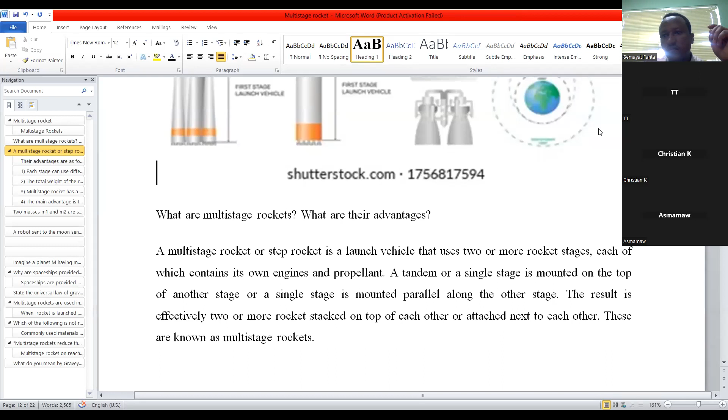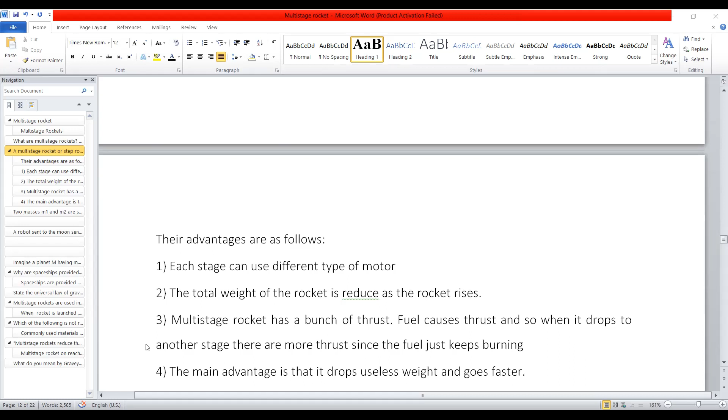What are the advantages of using a multi-stage rocket? Each stage can use a different type of motor, and the total weight of the rocket is reduced as the rocket rises. The third advantage is multi-stage rockets have a bunch of thrust - that fuel causes thrust, and when it drops a stage, there is more thrust from the remaining fuel, so it keeps burning. The main advantage is that it drops useless weight and goes faster.

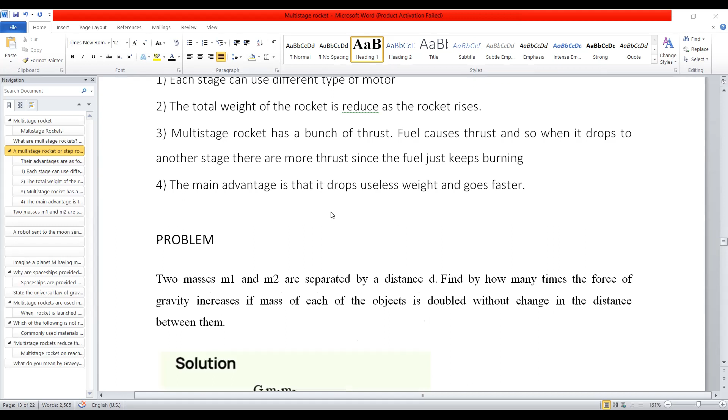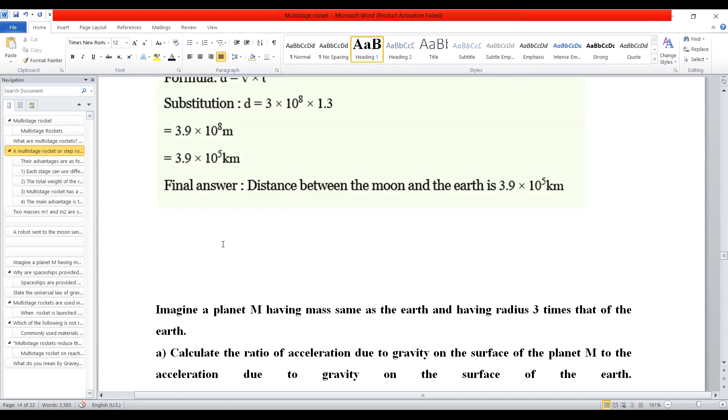These questions are not related to the topic we are talking about. Anyways, let it be there.

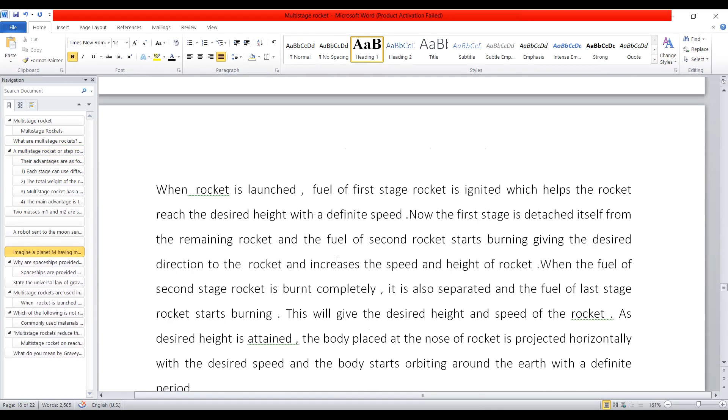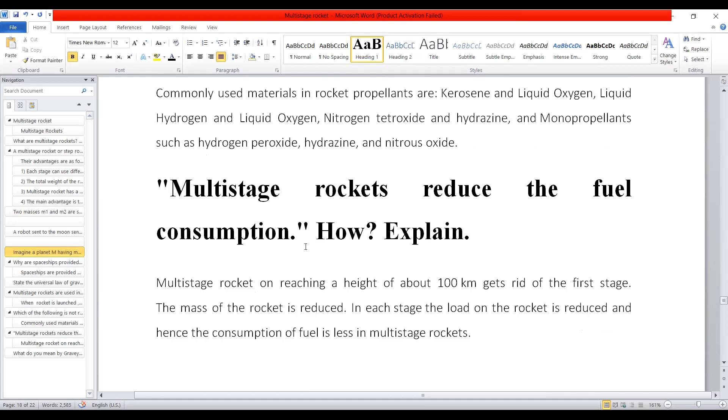So we say multi-stage rockets reduce fuel consumption. How does it happen? A multi-stage rocket, at a height of about 100 kilometers, gets rid of the first stage, and then the mass of the rocket is reduced. At each stage, the load on the rocket is reduced, and hence the fuel consumption is less in a multi-stage rocket. This is a simple answer.

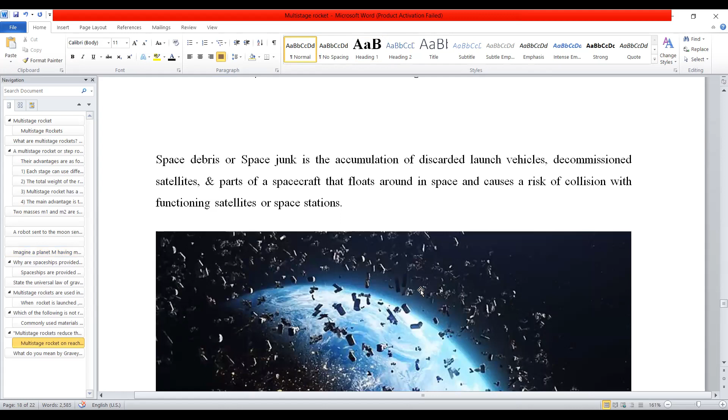What are space debris? These are multiple stage debris present in space, caused by stage separations. There are also some small asteroids and meteoroids which are orbiting around the Earth. So these are kinds of space debris.

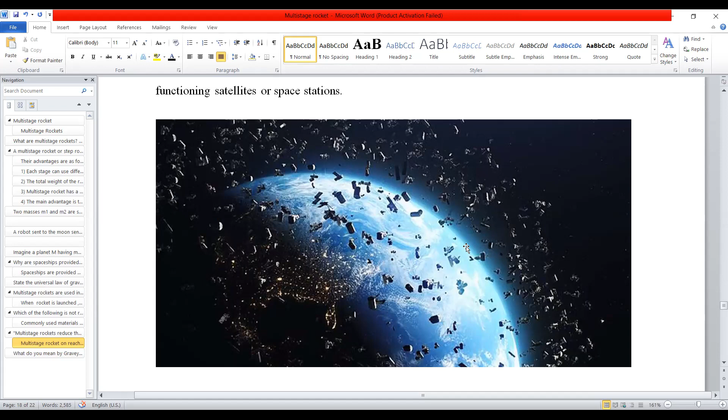Similarly, near the Earth's surface, because of discarded mass or discarded skeleton structures, we can find a number of debris like this. Not only this, there are some satellites which decay after a certain period - those that lost their fuel after a long time are also simply orbiting around the Earth. So these are also called space debris.

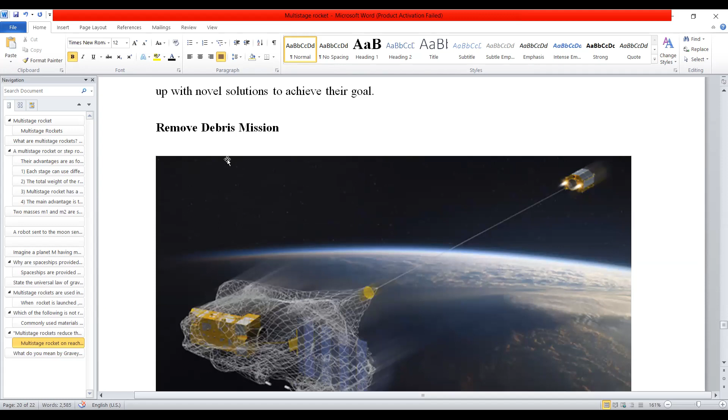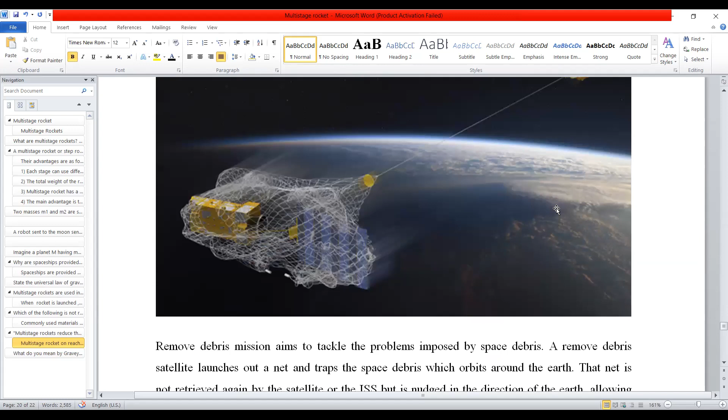So how can we collect space debris? There is a mission called the Remove Debris mission. This is the method people use to try to remove debris from space - they collect it with the help of some net. There are space launch vehicles which are launched to particular areas considered to have a concentration of space debris, so they can collect it like this.

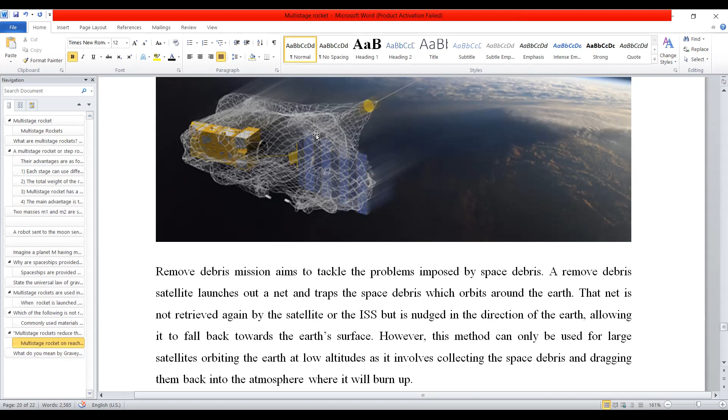Sometimes, a Remove Debris mission aims to tackle the problem posed by space debris. So the Remove Debris satellite launches a net that traps debris - there are traps and nets collecting debris from space. That is a kind of remedial action.

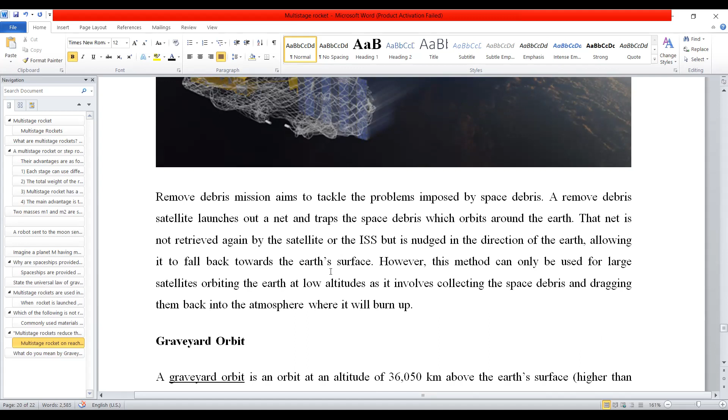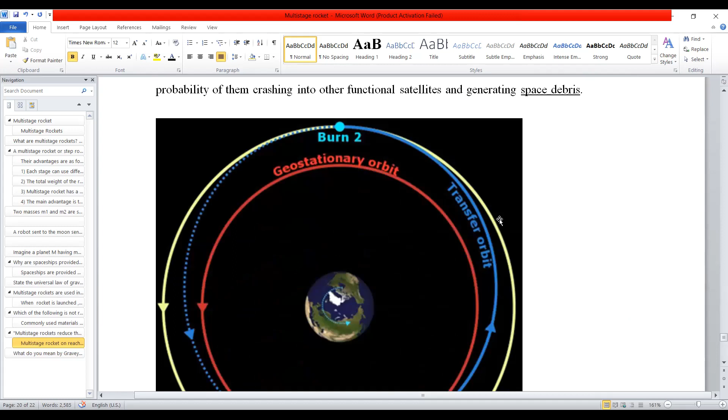The net is not retrieved again by the satellite or the ISS, International Space Station, but it is nudged in the direction of the Earth, allowing it to fall back towards the Earth's surface. So it collects the debris and brings it all back to the Earth's surface. That is the kind of remedial mission for collecting space debris.

Let's go back to the previous slide where we stopped, since I transferred from that slide to this one, in order to get more information. So staging is simply the jettisoning of self-contained propulsion units known as stages after the consumption of their propellants - a crucial technique for improving the mass ratio of a space transport system, not using an environmental engine.

The first theoretical analysis of staging was done by the well-known Russian scientist who developed the rocket equation, known as Konstantin Tsiolkovsky. To achieve a higher final velocity, the launch vehicle must be multi-staged and remove some of the structure that is no longer needed during the flight. This is the method.

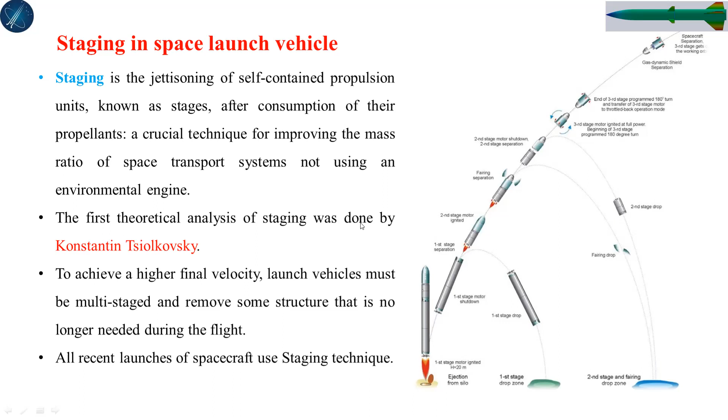So this is the method of how we can create staging and stage separation. What we discussed previously is all the same concept. So staging types are like serial staging, parallel staging, serial-parallel staging, and single stage case.

And stepper. So the serial staging is simply how we can connect a serial connection, having stacks on top of each other, one on top of the other. In the parallel, or sidewise mounted, the sustainer and booster stages are connected side by side.

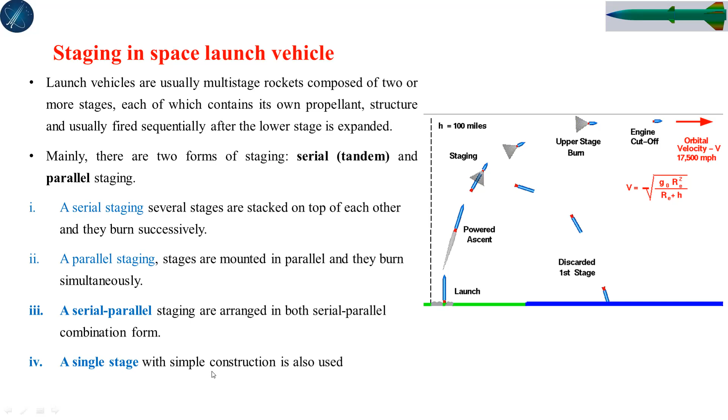And the serial parallel is a combination of the two. Another staging is single stage. Throughout the process, there may be only one single stage. That means even the structure with no use also gets carried along with that kind. But this is not an efficient method.

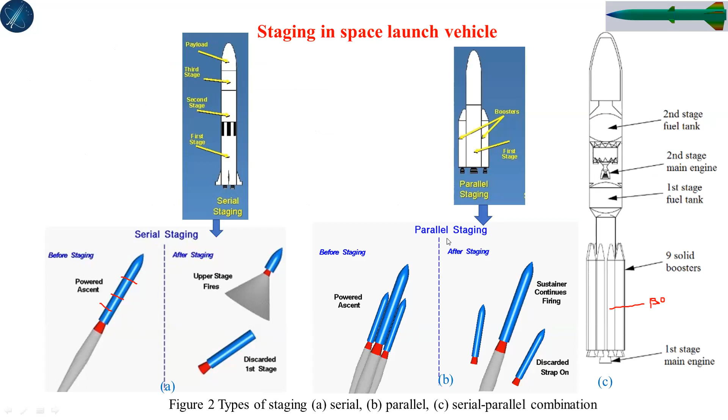So these are some of the serial or tandem staging, the parallel staging, and the combination of the two. This is what we have discussed already.

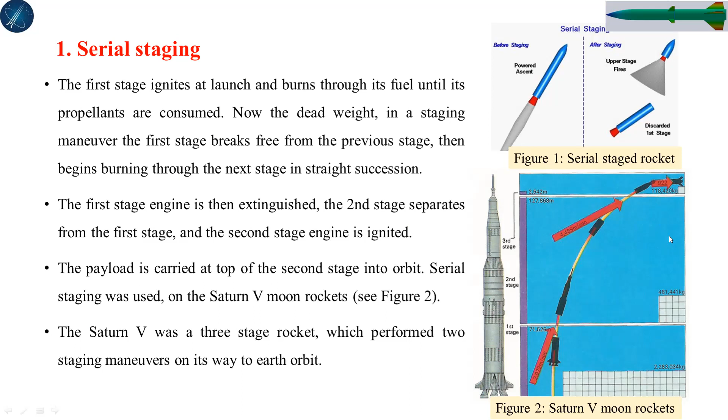So initial mass was 2,283,034 kilograms. At separation of the first stage, you can find 481,441 kilograms only. And at the final stage, after the separation of the second stage, the third stage left is 118,420 kilograms. So this is the amount of mass reduction and the amount of velocity gain we are checking here.

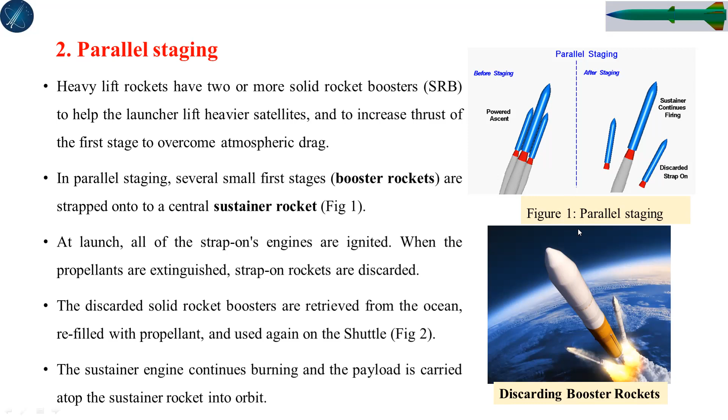So this is the parallel staging as we have discussed earlier. Serial parallel staging also exists. Single stage only - single stage to orbit, or we call it SSTO.

This type of vehicle reaches orbit from the surface of the body using only a single propellant and fluids, without expending or discarding the skeleton. Fully reusable vehicles that can fly into orbit and return to a landing site like an airplane ultimately use this type of staging - not really staging, but just a single stage.

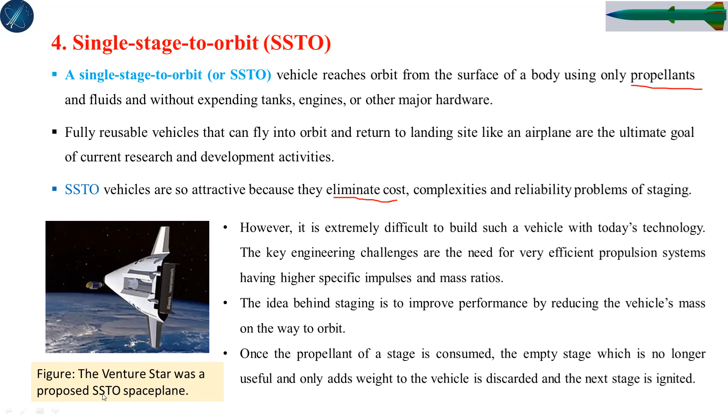So the best example is the Venture Star, which is called the SSTO type.

Another important thing, once we start to talk about staging, is the ascent trajectory is one of the important things. What is the ascent trajectory? We may have a particular point of launching, and after launch, the spacecraft will go through some trajectory path. So that trajectory should be designed at the very beginning.

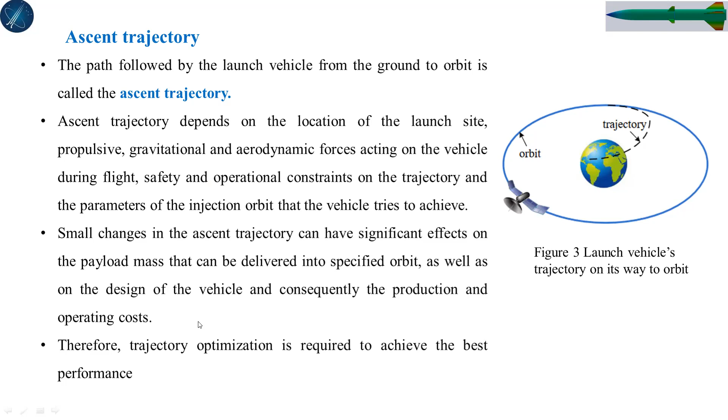Propulsive, gravitational, and aerodynamic forces act on the vehicle during flight. So for safety and operational constraints on the trajectory and the parameters of injection, that the vehicle tries to achieve, we can search for an appropriate trajectory and appropriate launching site. A small change in the ascent trajectory can have a significant effect on the payload mass that can be delivered into the specified orbit, so we have to think about how to optimize the ascent trajectory.

The second thing is the spacecraft. Still, what we are talking about is a space launch vehicle. Spacecraft is another thing. So spacecraft is just a vehicle, a machine designed to fly in outer space.

Outer space means space beyond the atmosphere. Artificial satellites and spacecrafts are used for a variety of purposes, including communication, Earth observation, meteorology, which is accurate measurement of conditions for navigation purposes, for space colonization purposes, for planetary exploration, and for the transportation of humans and cargo to space. For that purpose, we need a spacecraft.

This is a spacecraft, the Soviet Union's first spacecraft, sent in 1961. It is called the Vostok capsule, and it was sent with Yuri Gagarin. Yuri Gagarin left on April 12, 1961, with the capsule called Vostok. That is one of the spacecraft sent to space and come back to Earth. So this is not a reusable type, it is expendable.

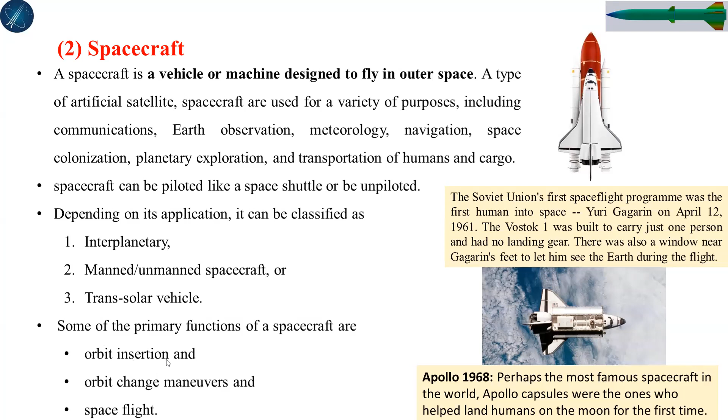Some of the primary functions of spacecrafts are orbit insertion purposes, orbit change maneuvering, and space flights. These are the main functions. The secondary function of spacecraft is attitude control, spin control, momentum wheel and gyro unloading, and stage separation. So these are secondary purposes.

In order to execute these functions, a spacecraft can carry a number of rocket engines. Pulsed small rockets with short bursts of thrust are also being used for such conditions.

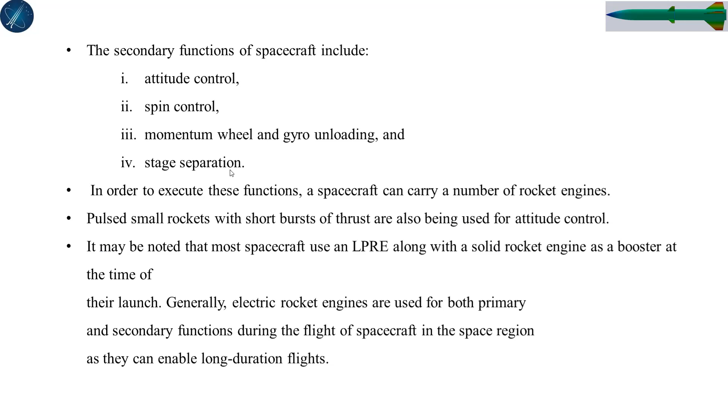So these are crewed spacecrafts, like Vostok 1, the first spacecraft, which was sent with Yuri Gagarin. Look, this is Vostok with its dimensions.

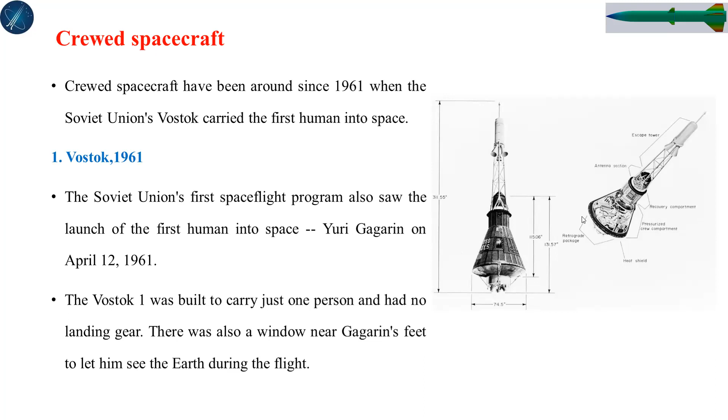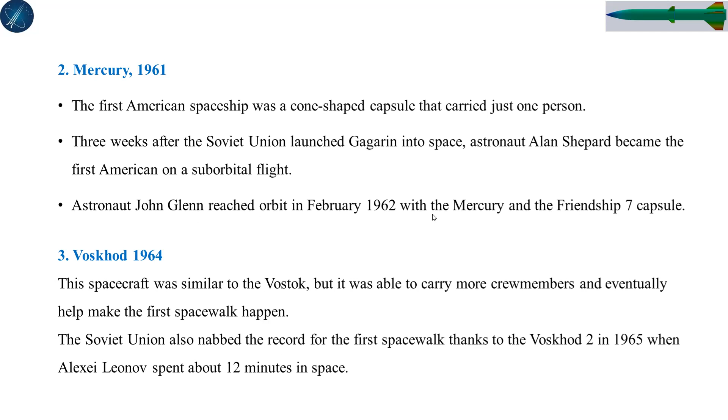Mercury, in 1961, was one of the American spaceships, a cone-shaped capsule that carried just one person. Three weeks after the Soviet Union launched Yuri Gagarin into space, astronaut Alan Shepard became the first American on a suborbital flight. Again, another astronaut, John Glenn, reached orbit in February 1962. So these are some of the histories.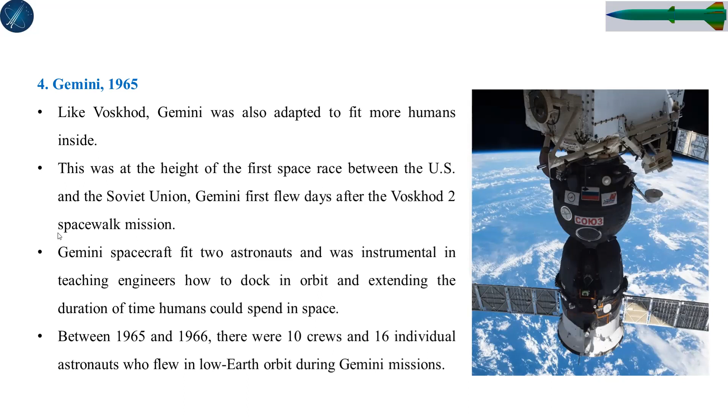Again, Soyuz in 1967 is another one, which was sent into space, and the capsule still ferries cosmonauts back and forth to the International Space Station. It is still working. The spacecraft was first developed in 1967, and the Soyuz of today looks much different; within just about a year, they also launched another Soyuz version.

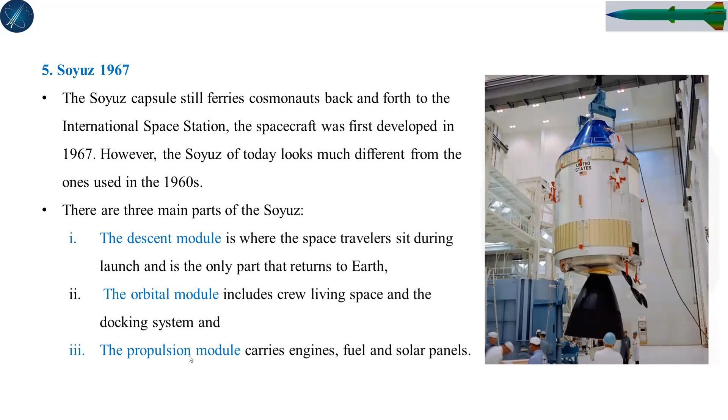So three main parts of the Soyuz are the descent module, the orbital module, and the propulsion module.

Another is the Apollo mission to the moon. Apollo is the first mission to land human beings on the moon, done in 1968. The spacecraft were designed to carry even more astronauts, including 12 people who walked on the lunar surface.

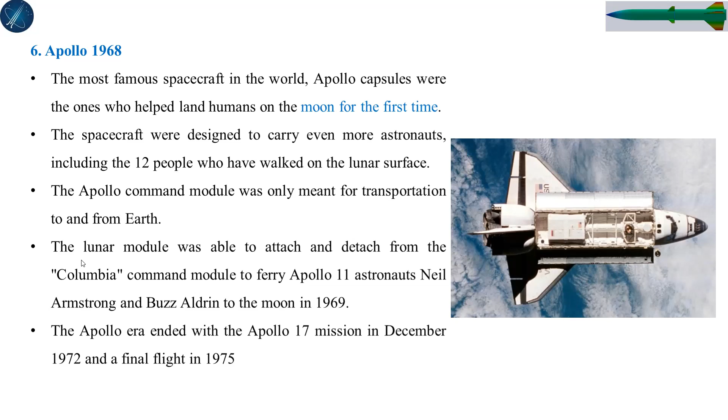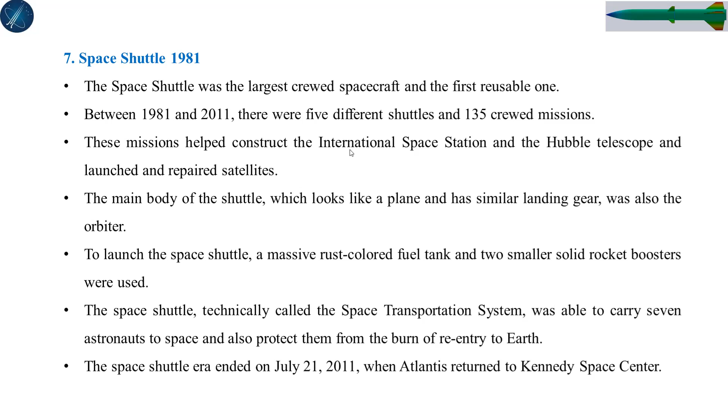Again, many types of spacecraft are there. Space Shuttle in 1981 is also another. Between 1981 and 2011, there were 5 different shuttles and 135 crewed missions performed. So this is the blessing of the space race.

Another, in the miscellaneous type, we stated the space shuttles, the spacecraft, and the miscellaneous missions. So missile is one of that miscellaneous component. In military terminology, a missile is a guided airborne ranged weapon capable of self-propelled flight, usually by jet engine or rocket motor.

Missiles are actually most of the time for military application. It is different from a rocket because a missile contains some intelligent system in it. The guidance system helps missiles to detect the target and hit it. It can check the proximity of the target.

For that purpose, missiles have 5 important components: the targeting system, the guidance system, the flight control system, the engine, and the warhead. The warhead is the one which causes destruction to the target or the enemy target. The engine is the one which provides propulsive force.

The flight control system helps to control its directional movement, like the fins and wings, which help control the pitch, yaw, and roll motion of the missile. The guidance and control system helps to detect the target, initiate the warhead, and check the proximity to the target.

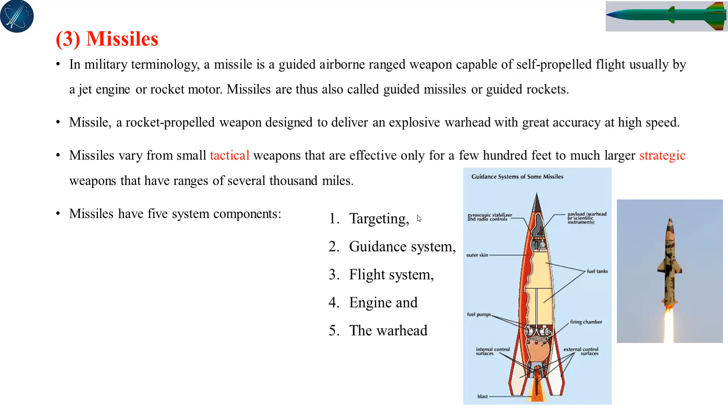So this is all about missile. These are some of the missile types, like the Peregrine air-to-air missile type. Missiles can be ground to air, surface to air, air to surface, air to air, surface to surface, or maybe intercontinental ballistic missiles, or tactical missiles.

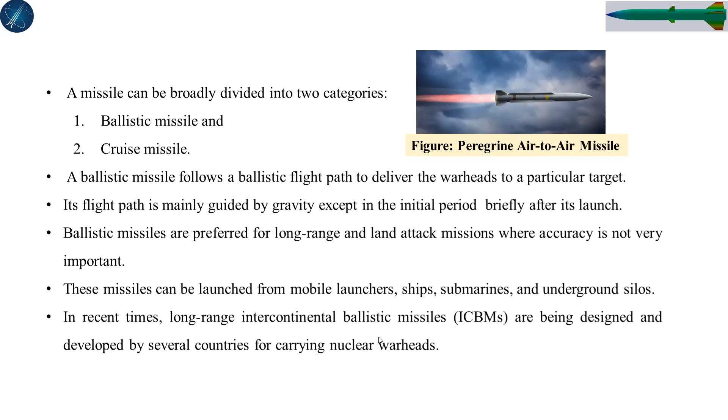So ICBM is the intercontinental ballistic missile which we use. Missiles can be guided and unguided. Unguided missiles are categorized like rockets, but guided missiles are called missiles. There are missiles used underwater, which we call torpedoes.

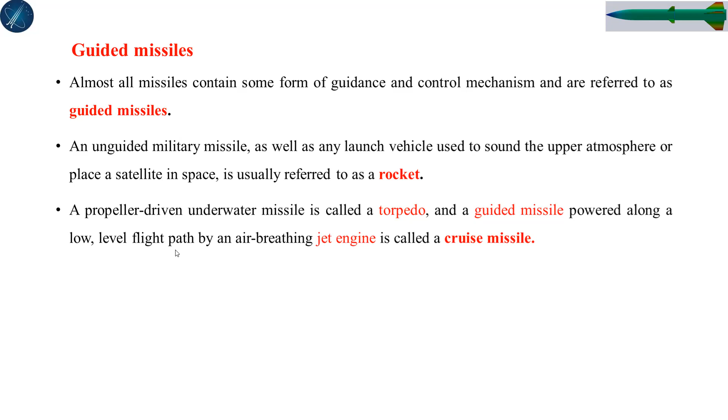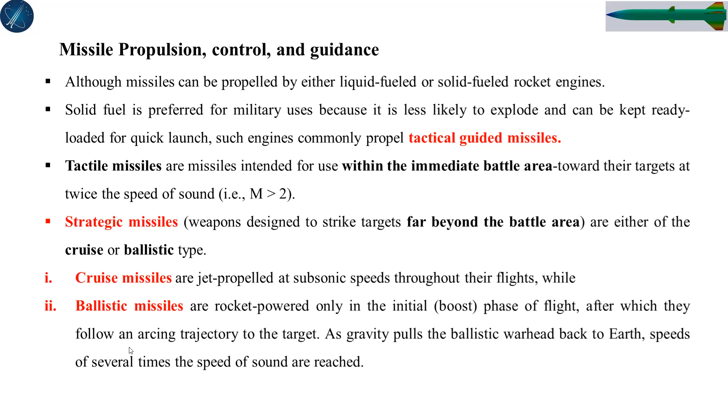And the guided missile powered along a low level flight path by an air-breathing jet engine is called a cruise missile. This missile propulsion, control, and guidance can be categorized into strategic missiles, cruise missiles, and ballistic missiles, which depend on the Mach number, meaning the ratio of object speed to sound speed. Based on that, we categorize them like this.

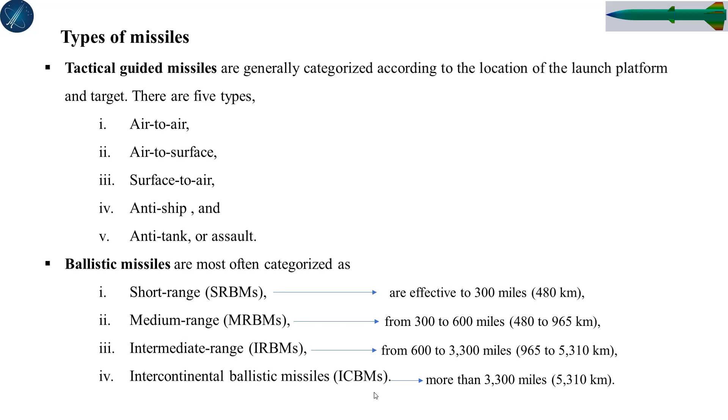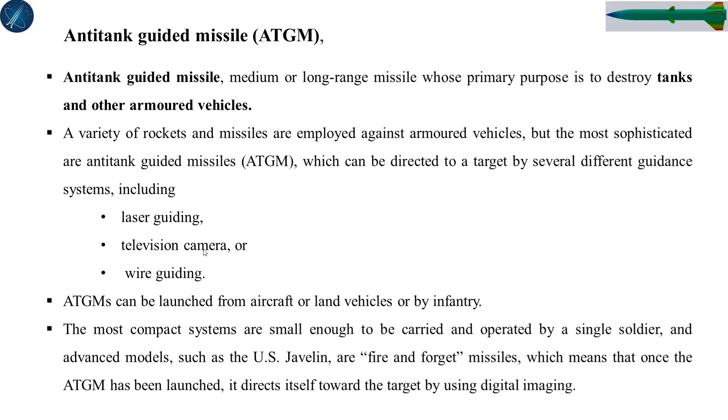So this is all about anti-tank guided missiles, we call them ATGM, which can be guided by laser, by television, or by wire guidance system. Many guidance systems are there. Anyways, we don't give much emphasis on these areas.